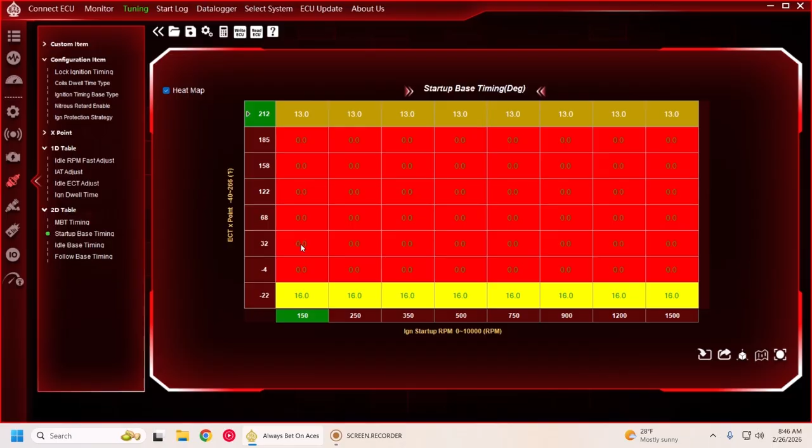All right, I will type it in manually. I will put it to about 16 degrees. And then up at the top, when it's real hot, I'm going to put it about 13 degrees, just so it'll crank easy. And somewhere in here, like above freezing, it really doesn't need to change a whole lot. So probably, honestly, this whole area can just be 16, and that'll be just fine.

All I'm going to do is fill the column values again. It'll smooth that out for me. When you first start it, when you're cranking, it'll be here. Then when it fires, it'll go over here. Unless you need more timing to help it get going after the initial crank, you can add more in here. But otherwise, you can just set this table straight across just like that.

Same thing with your idle base timing. You can start with whatever you want it to idle at. If you're not sure, you can lock your timing up here. You can lock it to 15 degrees and see how it idles. You can then set your static timing to, you know, 12 or 18 and see what it likes. I mean, you don't really know until you know.

This one wants about 16, 17, so I'm just going to say 16 on this low side. Come on, keyboard. There you go. And then up here in the higher load cells, you know, higher RPM, higher load up in here, I'm going to bump into my main table to make the transition smoother. So I'm going to grab this upper corner, something like that. And I'm going to put it about the same values as this table was, which was roughly 19 in that area.

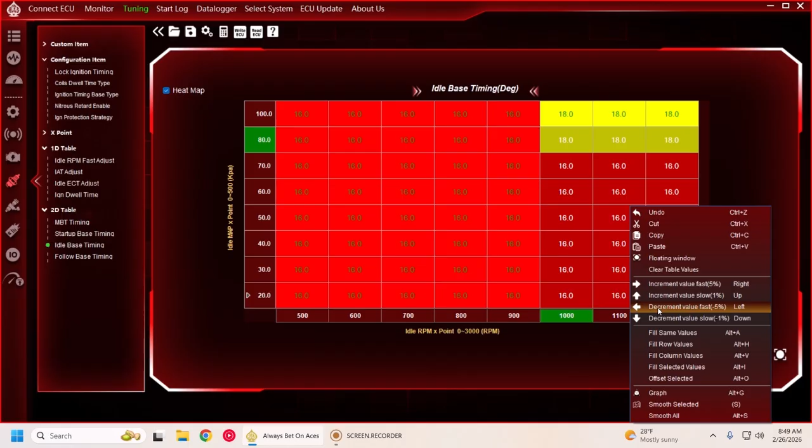Actually, I overshot as 18, not 19. Let me correct that. I'll just start it over again so you can see me do that again. How about that? Maybe we'll go 16. Now grab the top corner. 18 was the value. And pull it over. Well, I guess last time I did it down. Didn't really matter, not in this particular instance. Okay, I'm going to pull this guy over. A couple more.

Something like that, it's a good starting point. You can dial in whatever you think you might need, towards the upper end to 800 and the lower end to 700. It's going to idle right in between. So I'm going to take this number and bump it up just a tickle, just to get that transition a little bit better.

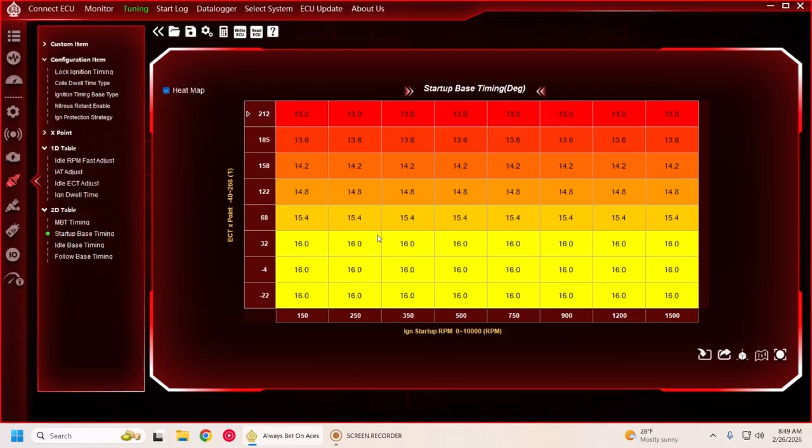And your follow base timing. So when you start the engine, it starts here. And as it transitions to idle, it hits this table. Then the minute you touch the gas pedal, it switches to this table. And then when you let off the gas pedal, it goes to this table. And it will fall back down to the idle table.

So the way this is set up is pretty far off from how I would like it. So I'm going to cheat. I'm going to grab part of this table, throw it in here like that, and then I'm going to lower it.

I've learned that it doesn't really like to be any lower than your idle base timing. It can be a little, but if it's too low, it'll make the idle dip pretty aggressively. So I like to try to match it, but as long as these values are less than your maximum, you're all right.

A couple points. It's a little higher than I'd like at the upper end, so I'm going to drop that down just a little. I think I overshot that one. There we go, that was better.

Yeah, something like that. You can nitpick, but there's plenty of time for tuning. This is just to get started up, get it fired up the first time.

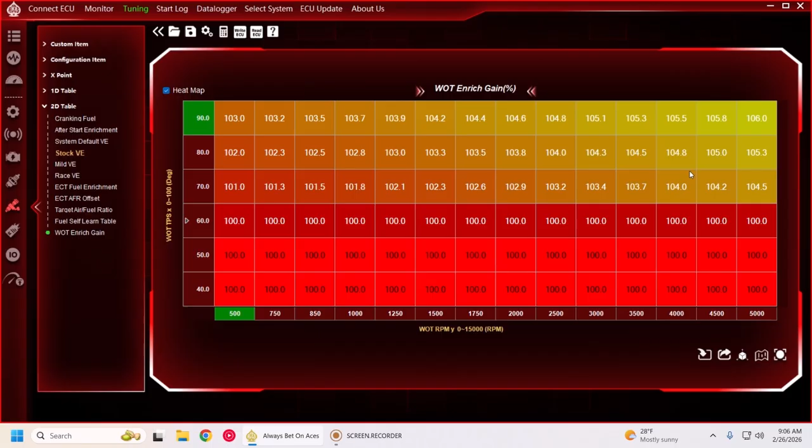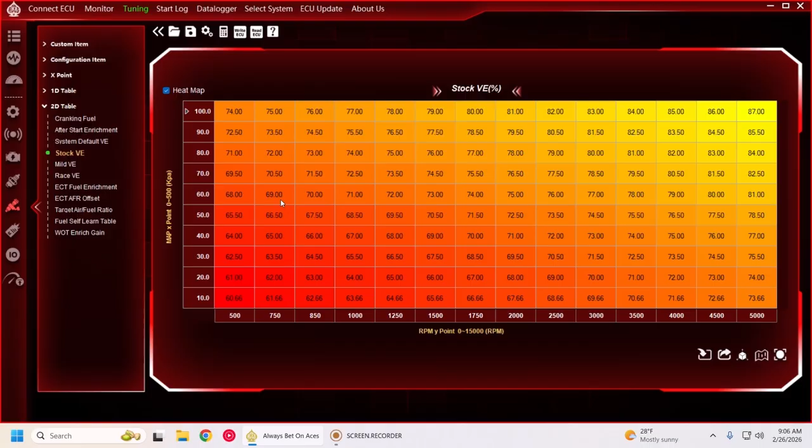The wide open throttle enrich gain - you can set this to 100. You can add fuel there later if you'd like, if you need it. But I found that this extra fuel it's dumping in randomly will screw with your initial settings on your table. So I'm not going to mess with this a bit. I'm going to leave it alone and start the thing up, and it's just going to be the way it is. I will learn from here, and I will screen record that as well.

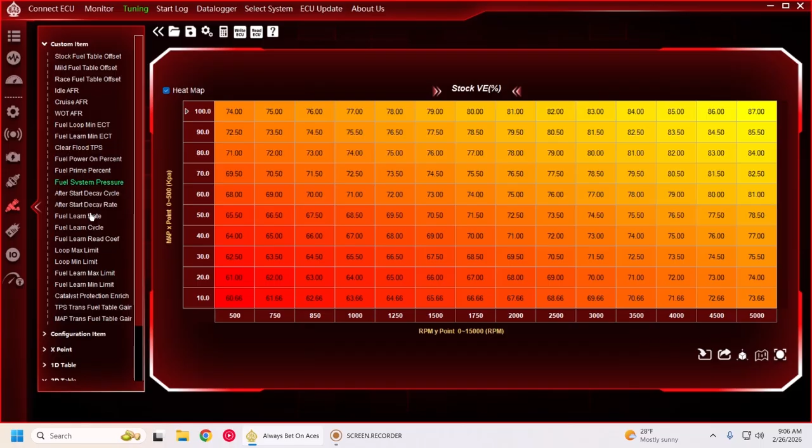Where is fuel system pressure? You need to make sure that this matches what you actually run, what your pressure actually is. Mine is set to about 56.

I think we're pretty good. I'm going to leave those on. I'm going to set this to 2D. I'm going to leave those on, and I'm going to hit save. And I'm going to call it the Killshot 454 baseline. I'll put a 1 after this - I know it's the first one.

Alright, I will switch computers again, plug this in, and fire it up. Oh, I gotta switch hands, I can't do this left-handed. I'm gonna open the app. Man, I gotta be careful with this adapter. Trying to run my stupid microphone. Oh, I already had it open. Okay, I'm going to load the baseline that I just made.

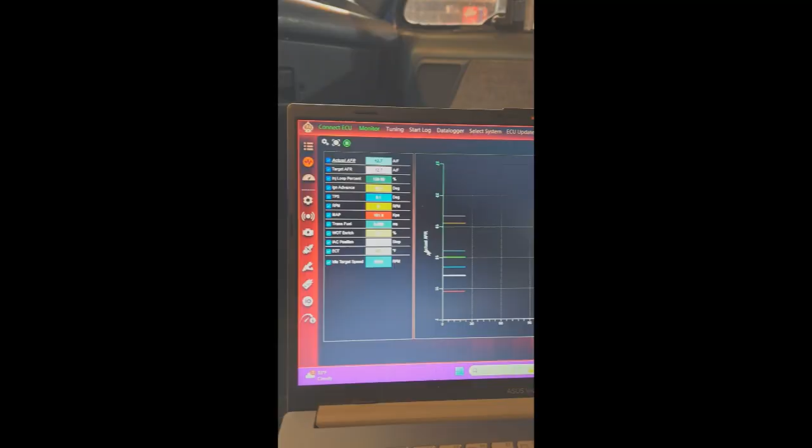Looks like I already got the stuff pulled up that I want for that. Alright. What I'm going to do is start it and back it out of my garage, because I don't want it stinking it up in here. So I'm going to fire it up, back it outside, and then start making some adjustments. Once I get it outside, I will switch to screen record to make this a little easier.

It cranked there for a minute and didn't want to fire, so I just cracked the throttle open. I'm still holding my foot on the gas pedal a little - it's smoothed out, so I'm going to ease it back down to idle. My foot is off the gas pedal now. I'm going to back this out before it stinks up my garage. Well, it's very unhappy right now, naturally.

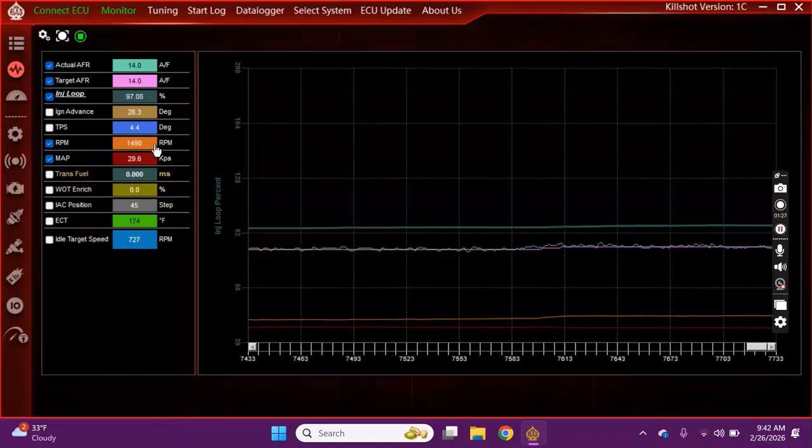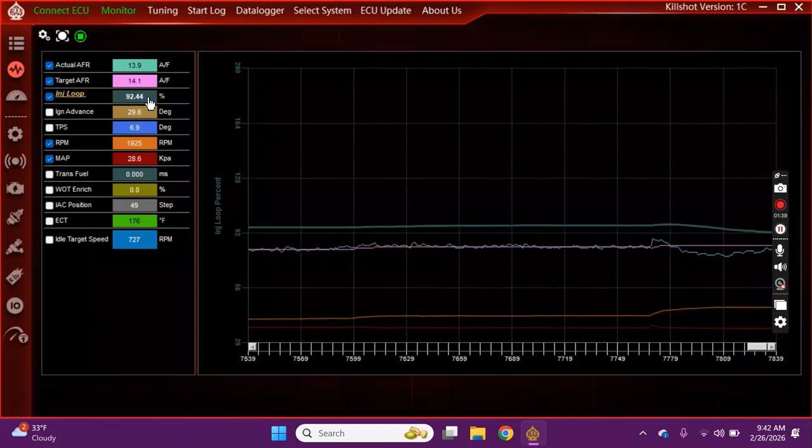I'm going to try to go up to 1500 again. Come on. Reasonably close. Pick up 2000. Pretty fat up there.

So, I didn't take anything out of 2000, so I'll pull 5% out of 2000. And then I'm going to switch to the floating window again. I'm going to go back to the table. Come on, or she's laggy.

And I'm going to watch this loop percent. All I'm going to do now, I guess I should write that. Every time you make a change, you should write it. I'm tracking it. You can see right where it's sitting right now, and you can see that it's pulling a whole bunch of fuel.

So I'm going to grab this whole area. I'm going to pull 5 out of it real hard, just like that. We're going to see what it does. See, it leaned out. That loop has to correct. Let's get closer.

Two more percent coming out of it. Getting reasonably close. Two more. And yes, this is very choppy right now. You'll smooth that up later. We're just trying to get it to idle clean, just off idle clean. That's just about it.

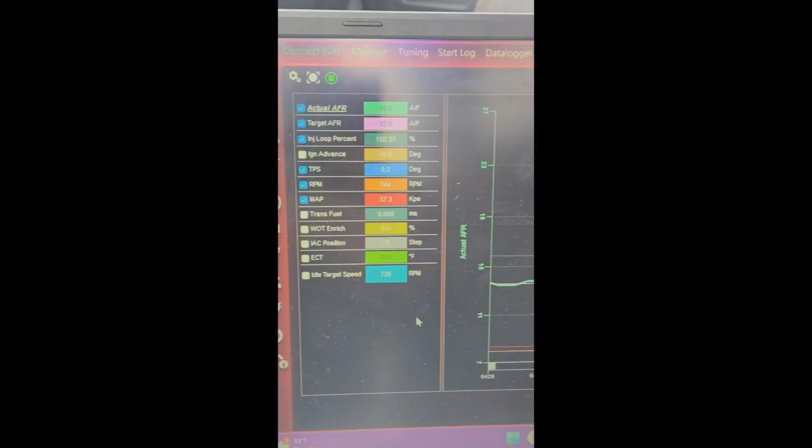I'm just barely touching that screw, you can see. That runs reasonably nice.

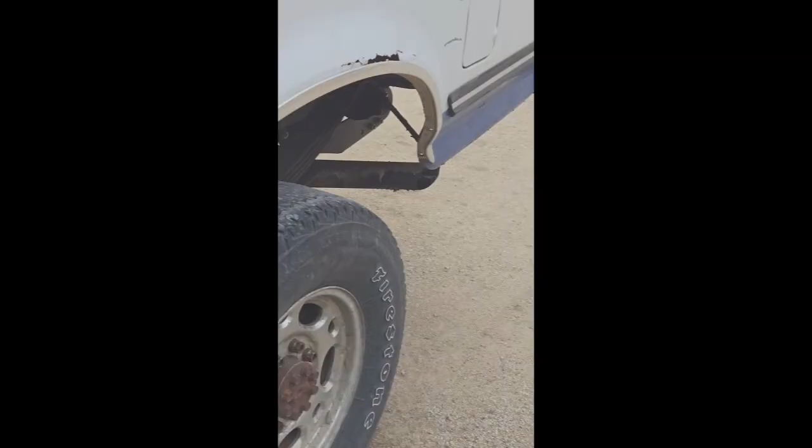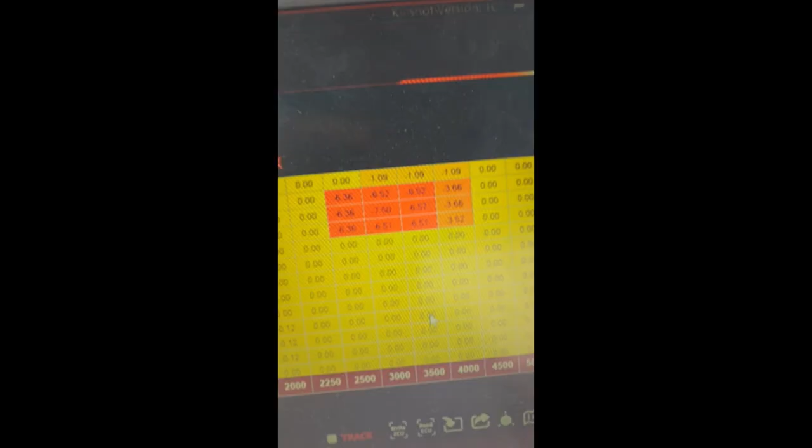Here's an updated learn table. You can see the mid-range is pretty good, but right up in the top it's still pulling some, right in the peak area. So I can fine-tune that area just a little bit, but it's pretty darn close.

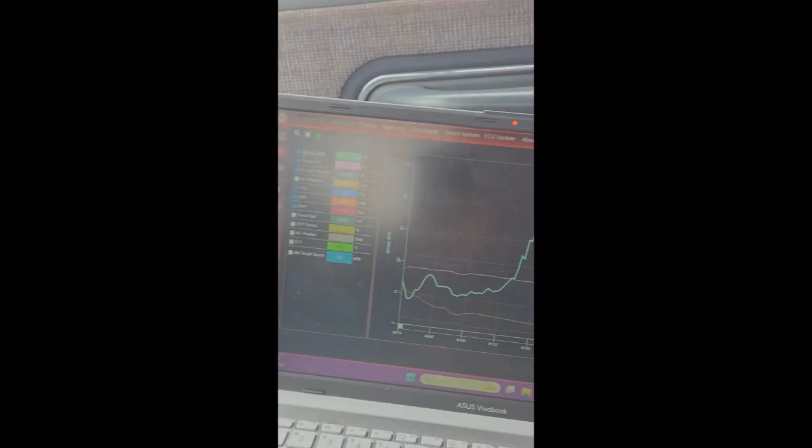Alright, I'm just going to roll out of the throttle. That's that low MAP value, high vacuum area. So when I went to tip back into the throttle to continue accelerating, it had a little burble. So those two bottom rows, I can raise those up another couple points to get that out of it.